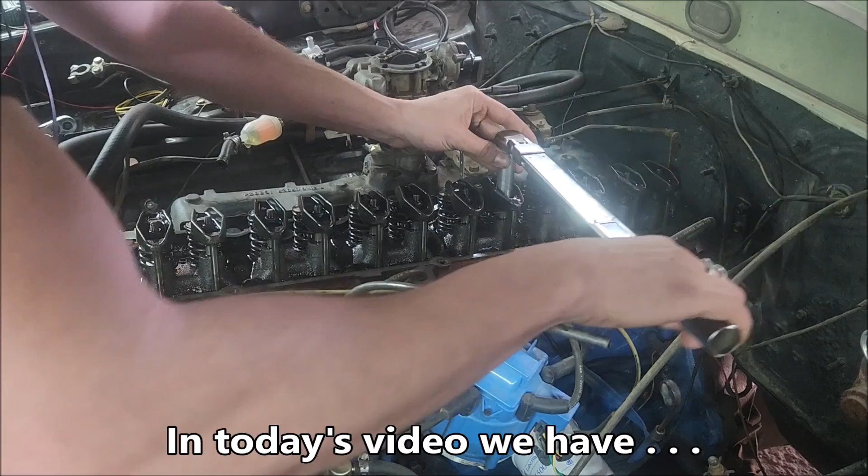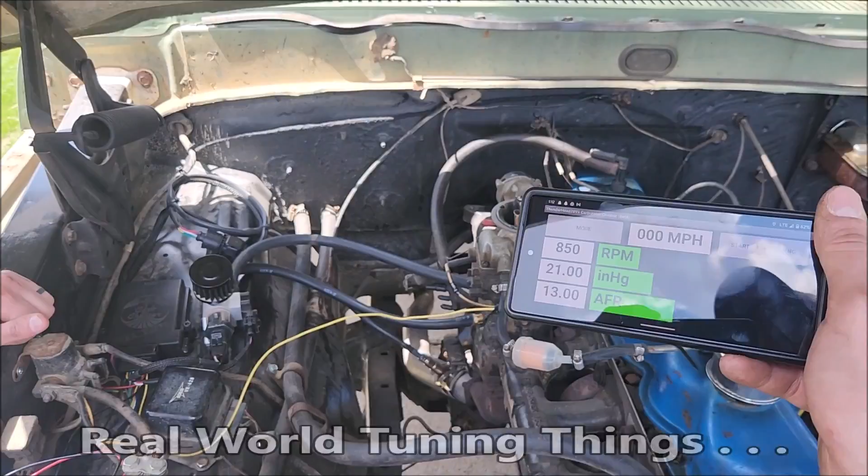I'm going to go through all these the right way, because technically I want them to be on the base circle, just to make sure we're not adding anything from the spring. But technically when something's bottomed out, this is all just thread stretch anyway. Perfect, and that's really all we needed to do. After everything else we did, the thing's just that good.

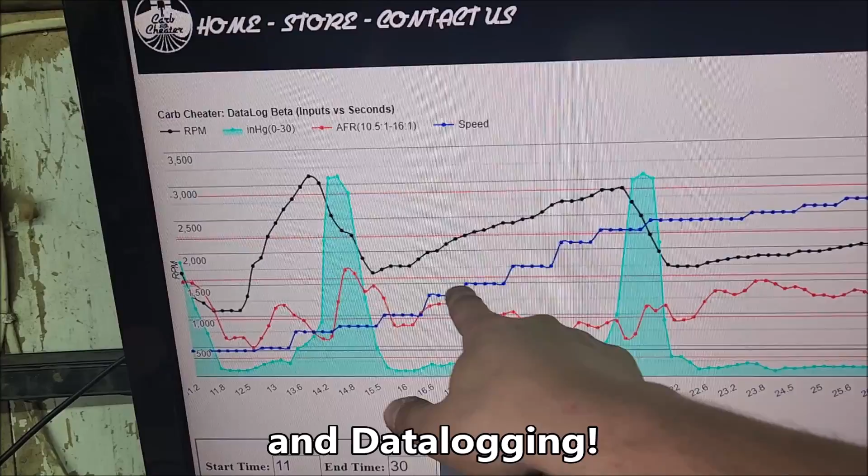51, 53, 60, yay! Oh my goodness. Mid-12s or so, and speed is slowly coming up from the poor little 300 inline six. Our shift where we lift off the gas, and we're at high RPM in a manual, so vacuum's gonna go high.

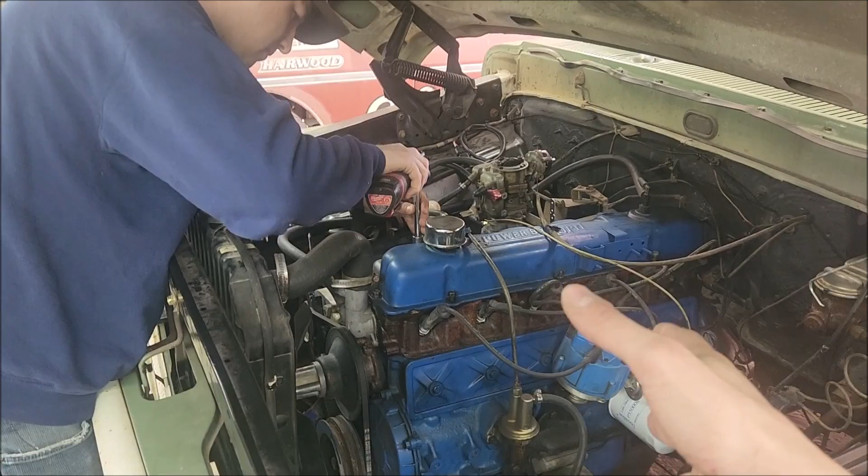So like you guys said in the last video, and we could hear it as well, it sounds like there's some valve train noise. And as we referenced, the cylinder head had been off, so the valve train probably had to be reset. So we're going to get that off and get a look and go through and adjust our valve train really quick. And we also have an interesting ignition thing that we'll get to in a moment, but first, let's get this valve train handled.

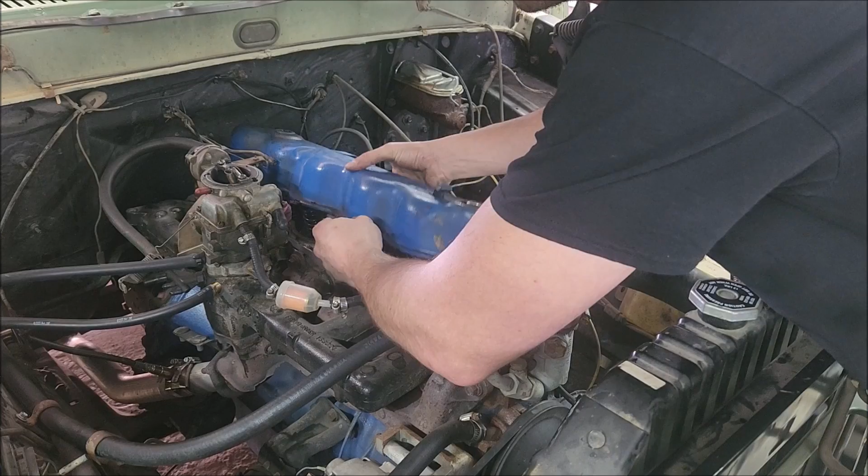All right, so it's kind of some exploratory stuff. So apparently I was wrong in the last video, this cylinder head is not from the 68. And this might be a 240 or a 300. What's the bottom end on this? I think it's a 300.

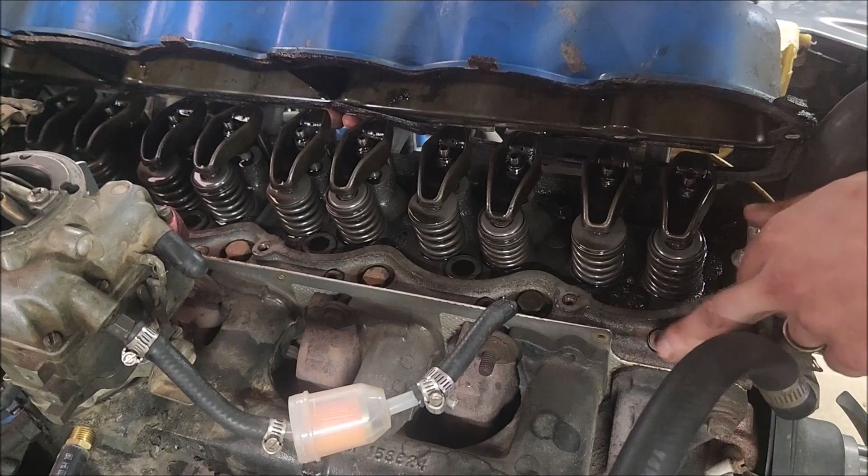Okay, and so the cylinder head looks like it's a fuel injected head with these, and maybe if you guys know, you can let me know. Like I said, I don't have a lot of direct experience with 300s. I thought maybe it would have pedestal rockers, but it doesn't. It does have, in fact, adjustable rockers unless they tighten down on the end of the stud.

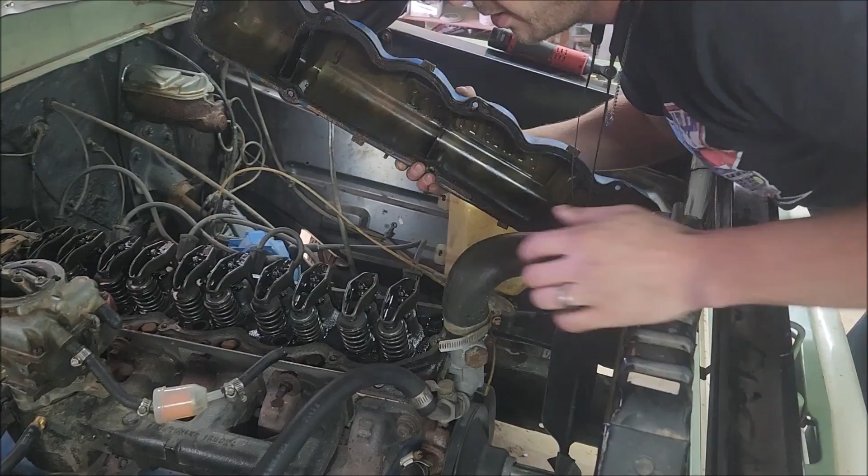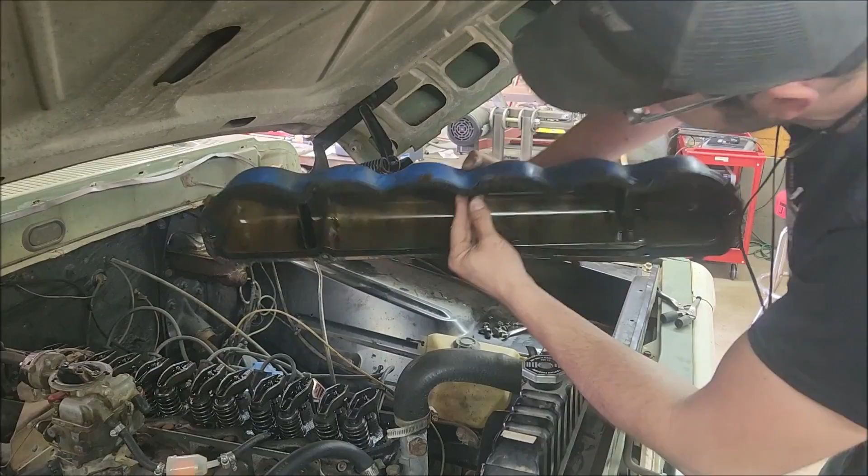So we'll pop one off and take a look. But side note, cork valve covers are pretty good. It always helps to gasket sealer them to the valve cover itself and then run a thin layer of oil on the mating surface, and then they never stick and they always stay on the valve cover side. So luckily we got this one off without screwing it up. It's rare.

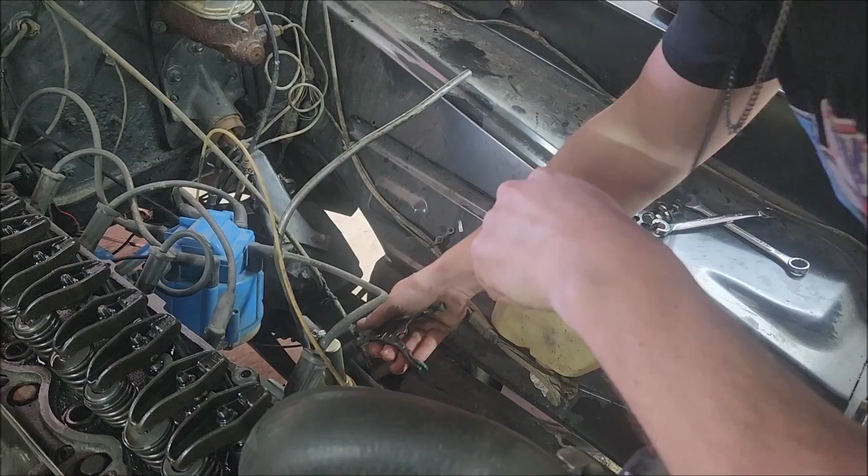Oh mate, it's still leaking. I thought we tightened that. Well, did you get where the vice grips at? Well, they're right there, and I got distracted. All right, there we go. You can always make a quick fuel line clamp with some needle nose vice grips and some rubber hose. In this case, gas tank's in the cab, so that's a lot higher than this point. There we go, lost about like a gallon of gasoline. It's fine, cleans out the sinuses.

All right, so it looks like these are technically pedestal style, and probably 300 inline six guys are going like duh, but you know, I mostly work on Windsors, so I was kind of unfamiliar and I didn't really want to use the Google, but you can tell they're pedestal even though they have a stud. One dead giveaway is the adjustment nut, or rather in this case the locking nut isn't one of those that's, you know, like a lock nut style.

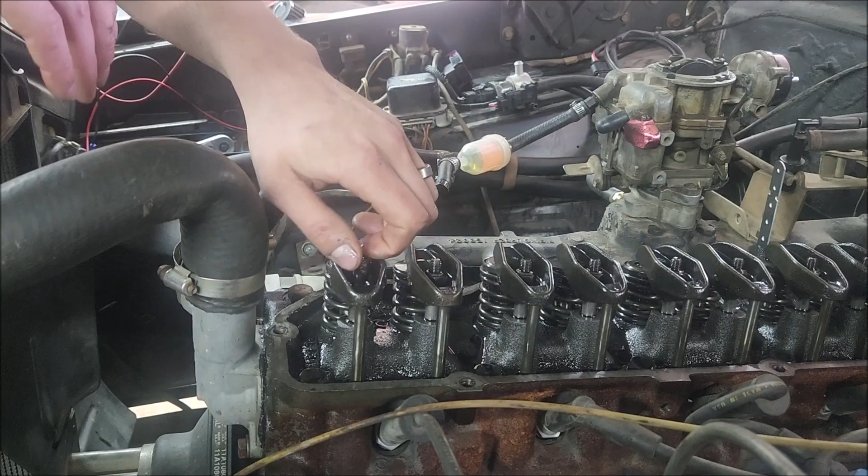It just rotates, and so basically what you're supposed to do is run it all the way down and then just set it to the torque. Let me get the rocker arm off here.

So you can see it spins on easy. If you tried to adjust this and say, yep, it's good, this would move all over the place. So it's supposed to be down all the way with the rocker arm on there, and then it's just torqued, much like a normal Windsor style pedestal rocker.

A lot of people get tripped up by this stuff on forums with these on some Windsor cylinder heads. So we're going to go through the sequence just because I feel better about it. When I do valve train, there's a lot of different ways people say, tighten this, go a quarter turn, tighten all of them. That's a bunch of tomfoolery.

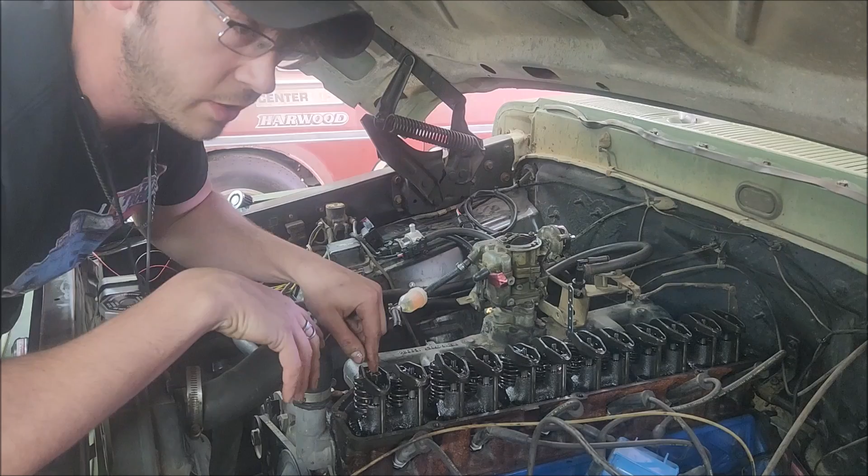The easiest way to be sure of everything is right now I'm turning the engine over and watching this rocker arm. When it's at its max dwell, it's not going down anymore. Now if this was an adjustable rocker, you could successfully adjust this rocker on this cylinder, but in this case we're going to torque it, and I just feel better about doing it this way anyway.

The reason I do that is it works for any engine, because there's no engine on the planet where, when the opposing valve is at max open dwell, the valve we're adjusting is opening. You want to be on the base circle of the cam, and 100% of the time it's going to be on the base circle of the cam in this case, with almost any engine I've encountered.

So when you don't know or you're not sure about things, it's always a good idea to look things up. This is a weird hodgepodge engine, and I'm not familiar with the torque spec on these in-between era pedestal stud rockers that you torque instead of making an adjustment with preload. They're just going to be what they're going to be. I think we found that they're supposed to be 20 to 25 foot-pounds, somewhere in that range. 17 to 23, whatever.

I'm going to go through all these the right way, because technically I want them to be on the base circle, just to make sure we're not adding anything from the spring. But technically when something's bottomed out, this is all just thread stretch anyway.

Okay, well, they're all tight, and they're just going to be noisy, apparently. It just is what it is.

Good. Sewing machine. Sewing machine indeed.

All right, we went through all the valve train, checked everything. Everything seems just fine, so we can cross that off our list. Now we're looking at this ignition piece.

Now on a Ford like this era, you know, '68, it would have been a points ignition vehicle. And even Ford, having a love affair with the Duraspark in later years, they all had resistive leads. Now this has an HEI distributor in it, so it's expecting to see 12 volts.

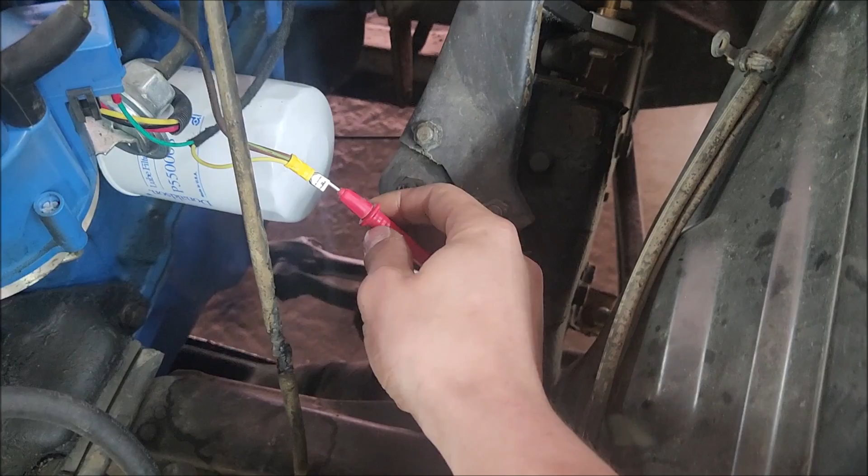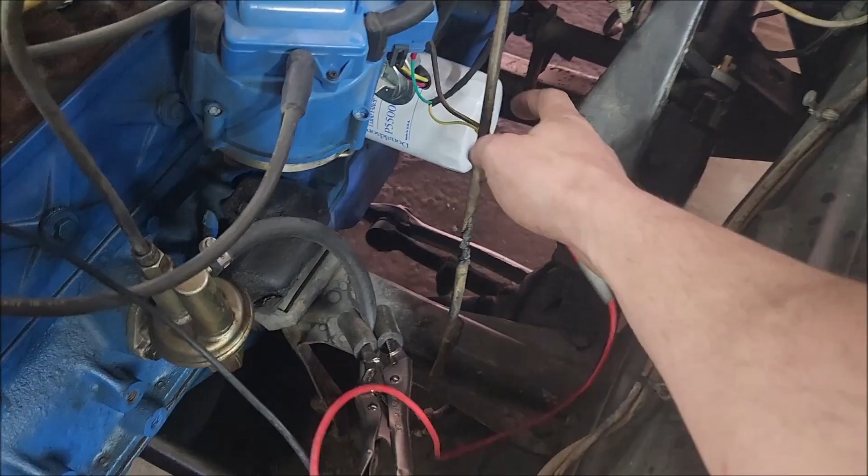All right, we've pulled the ignition wire from our HEI, which definitely looks like the factory Ford wire, so probably definitely a resistive lead, but we're just going to verify. So our positive lead is here on our ignition wire, and then we're grounded to the block.

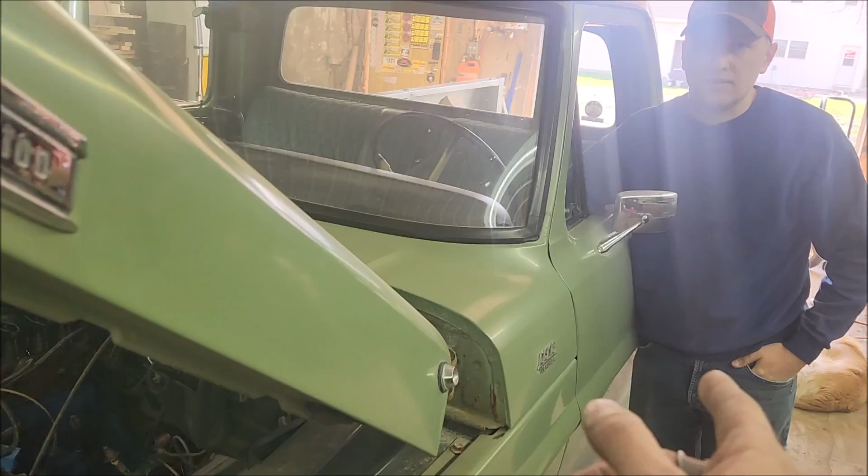Got our multimeter set to voltage. Joe is going to flip the key on to ignition. Good? Yep. All right, and then we're going to take a little look in here. And it reads nothing. Is your key on? Key's on.

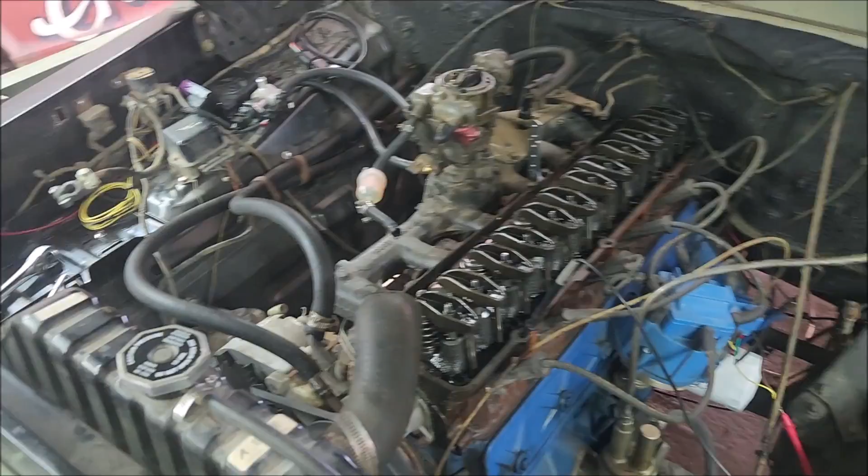Oh, your battery's not on, though. Forgot I borrowed that for the tractor. Rip. Okay, here it is.

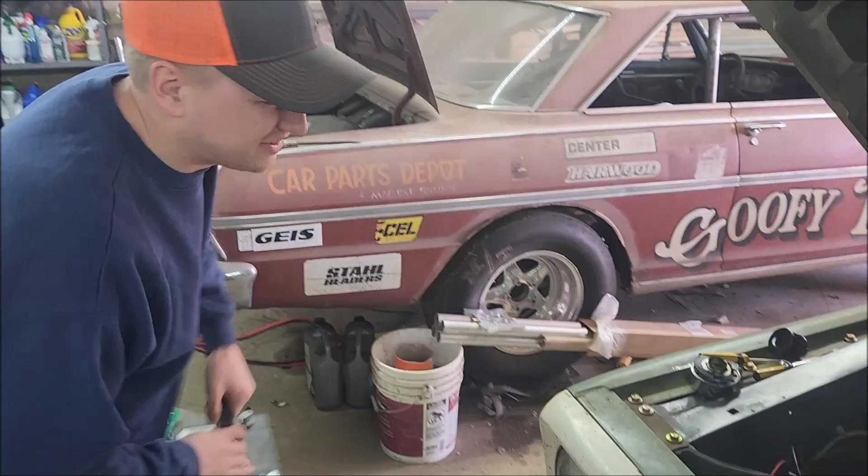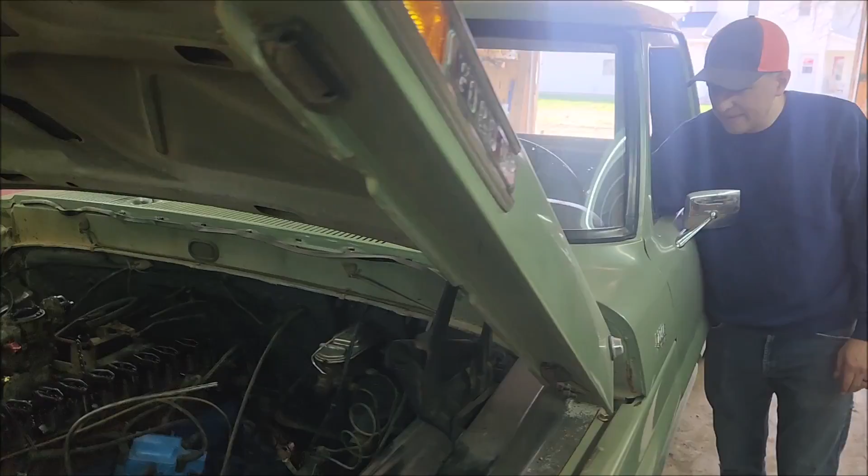All right, so take 2 with the battery, mate. Is the meter on? Sure is. How about now? Oh no, it's actually 12 volts.

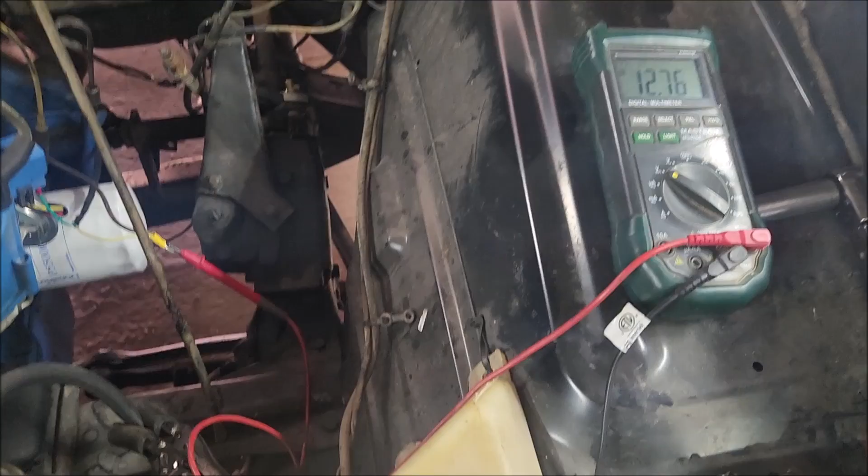Oh, well, that throws a wrench in things. So what do we got going on there? 'Cause I'm pretty sure that's the resistive lead. Now normally I test this with a vehicle running, but being the HEI, I didn't. I don't know if that plays into it in any way, shape, or form. I guess it could, question mark?

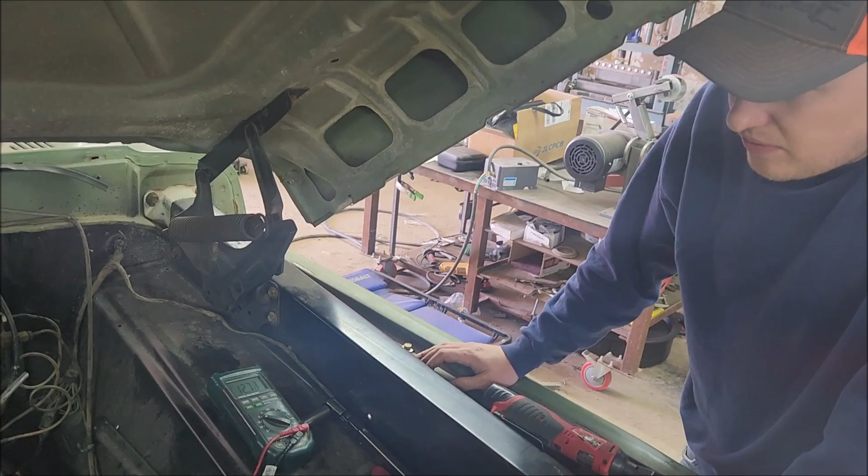Yeah, I mean, if the resistive lead has no current passing through it, it basically just allows all the voltage through it. V equals IR. Science guy, doing science things. So alright, well, let's throw our valve cover back on and check that again.

Fancy tool guy. Lazy tool guy.

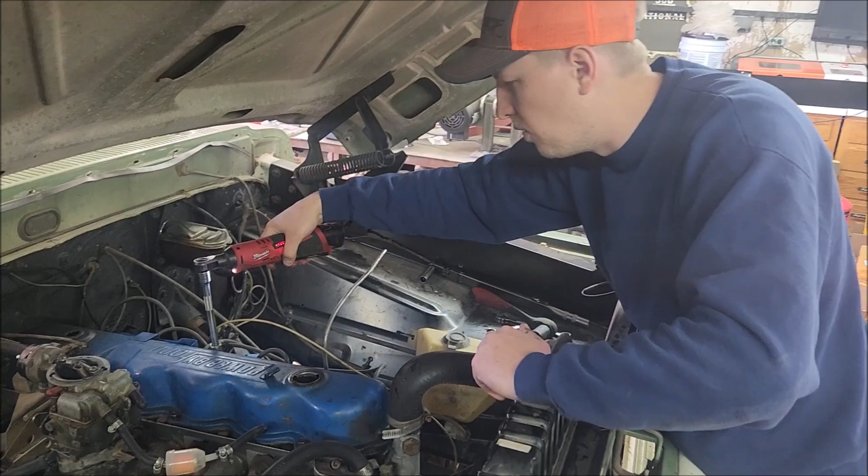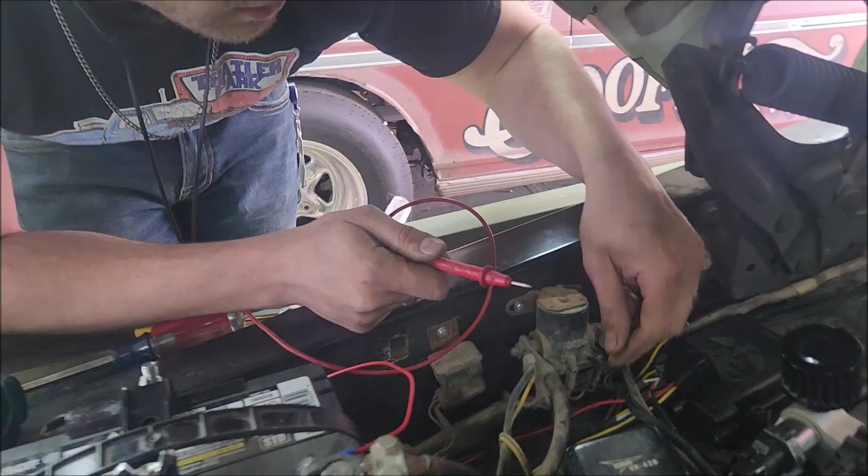So I think Joe bested me here, he's definitely right. At least this truck definitely was originally a resistive lead. One key indicator is on the Ford starter, it has this I, and basically when you're cranking...

...it supplies 12 volts and bypasses the resistive lead. So without starting the truck, if we unhook this, and it's a 300 so it'll probably just start because that's what it does, and we crank it, we should see a lower voltage. Right now we have zero.

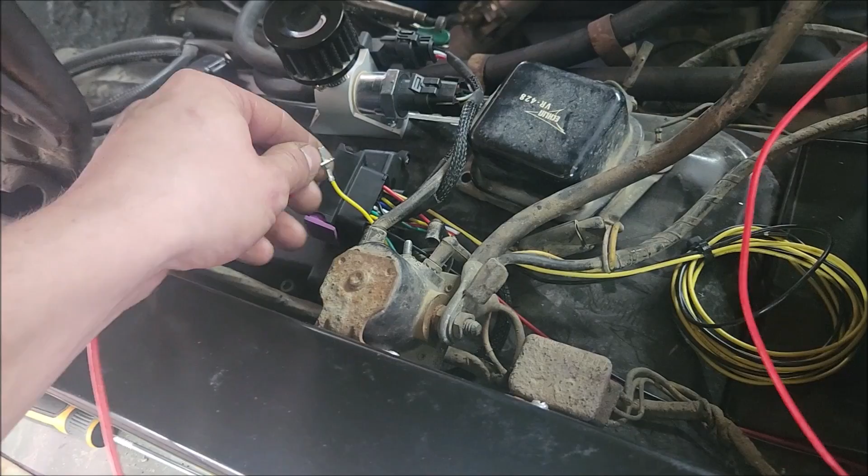All right, so Joe's gonna crank the truck here with our lead unhooked. We should see less than 12 volts. Actually, turn the key on first, and then we're gonna look at it. Key on. All right, see, there we have 12 volts, and we don't have any load on it. So now go ahead and crank it over.

Yep, it's a resistive lead for sure. Okay, you were right, sir. You have bested me. Electrical engineering school did something.

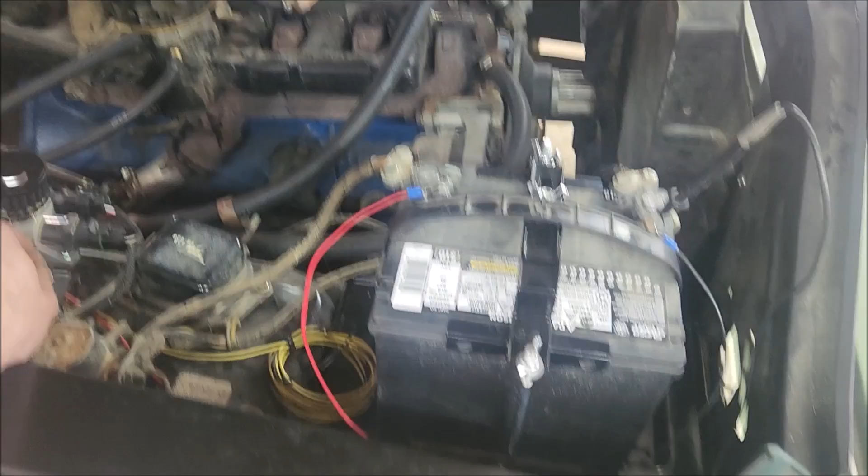Hey, there you go. All right, just for some science here, we have the lead hooked back into our starter solenoid, which should bypass and give 12 volts to the ignition while cranking. Go ahead and crank it. There we go. Yep, higher voltage cranking, and then once running, we're back to our resistive lead.

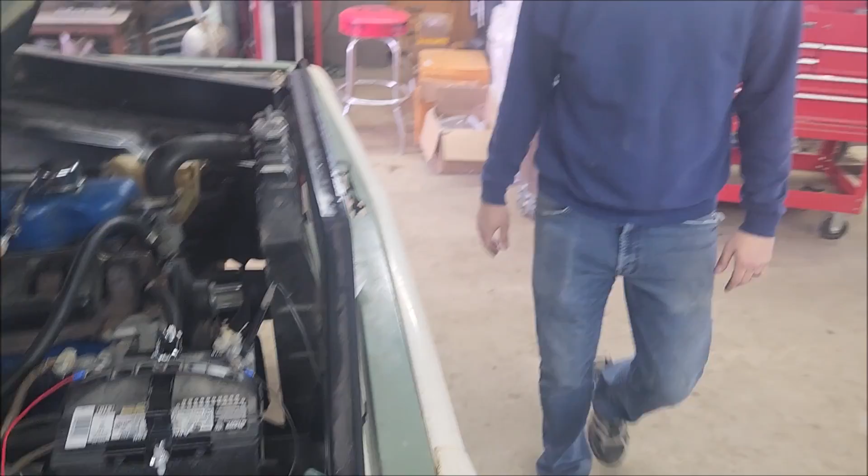Okay, problem solved. So it's been assessed that we have a resistive lead. Now, the right way to do this is to climb under the dash, clip the resistive lead out, and run a new wire. But we're kind of on a tight schedule today, and my back hurts, and I don't want to lay under the dash today either. So we're going to do something a little unorthodox, but we'll see how it goes.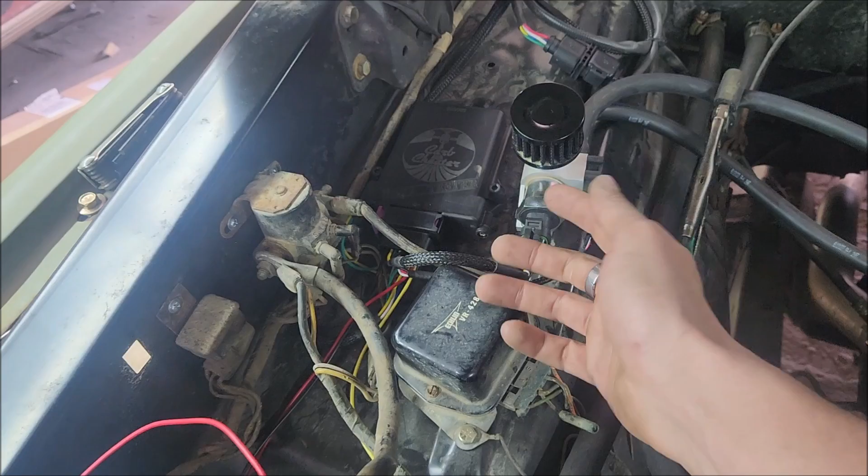So with the carb cheater here, we have kind of a universal auxiliary lead that you can set up to do anything you want with it. Our thought was kind of a window switch, which is basically an RPM-based switch, or you could use it for a choke. There's a few different settings you can set this up with in the app, and we'll look at that in a second.

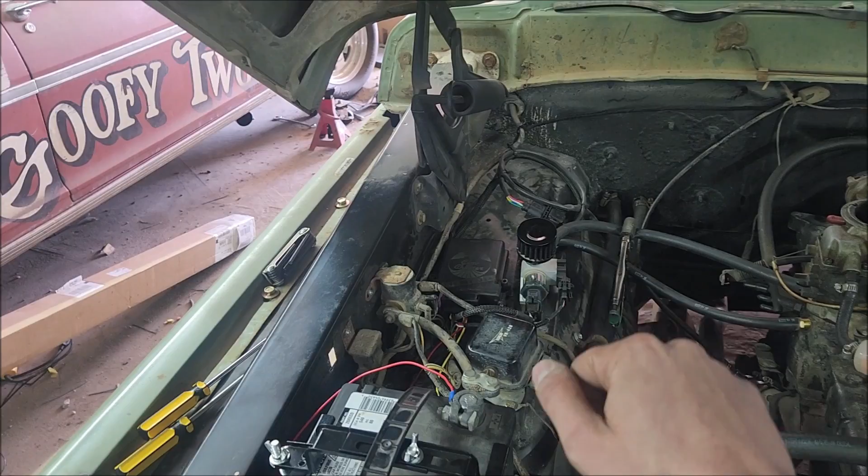But basically, it's a dry contact. So all we have to do is hook one of these leads to the battery, and one of these leads to the ignition over here on the distributor, and it toggle saves for this setting we're going to use. So when the key's on, it's going to be passing 12 volts to our distributor like we want, and when the key's off, it's not going to be.

Is this what you should use this for? No, our main thought was to use this for a choke, where when your key's on, now you have power to your electric choke. But it'll work for this, and we're just going to see what happens.

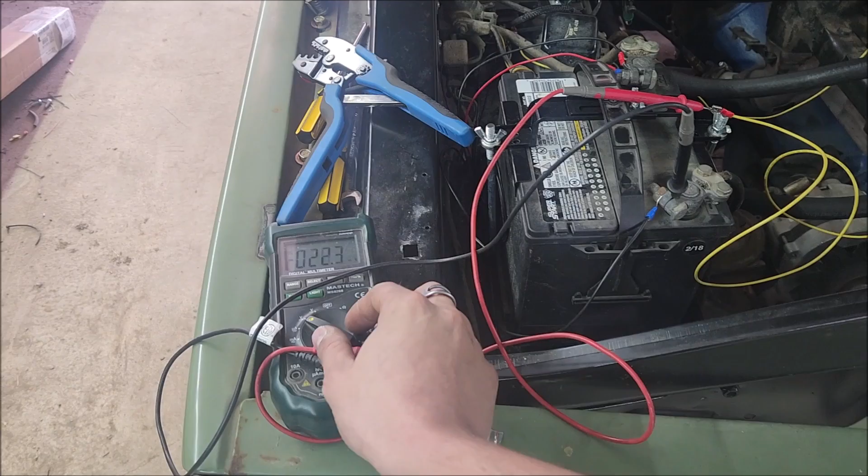All right, we got our carb cheater dry contact leads. One side's hooked into the battery, and at the moment we have it probed here with the multimeter so we can take a look at how this works. Make sure we cycle our multimeter so it doesn't shut off in the middle.

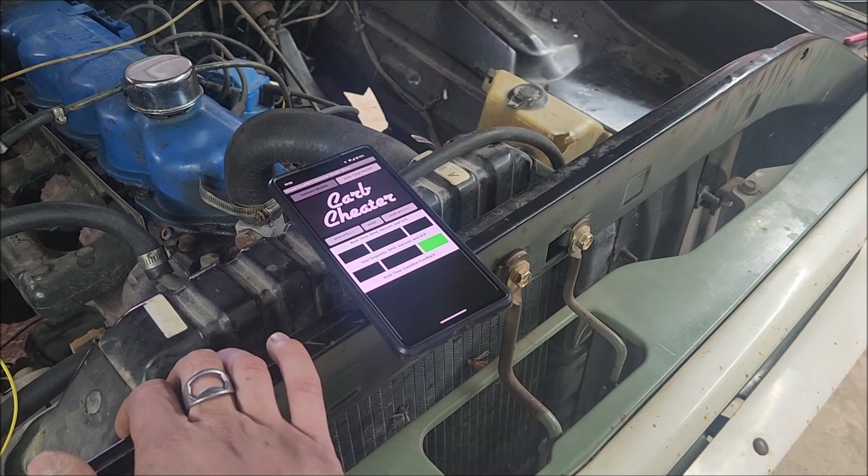Okay, let's go ahead and open our app. Should auto connect here. Bing, there we go. So now to get to the setup screen, you'll put in your product key. Each of these has a specific product key for it, so someone can't connect to yours and do crazy stuff with your engine. Each one has its own unique code.

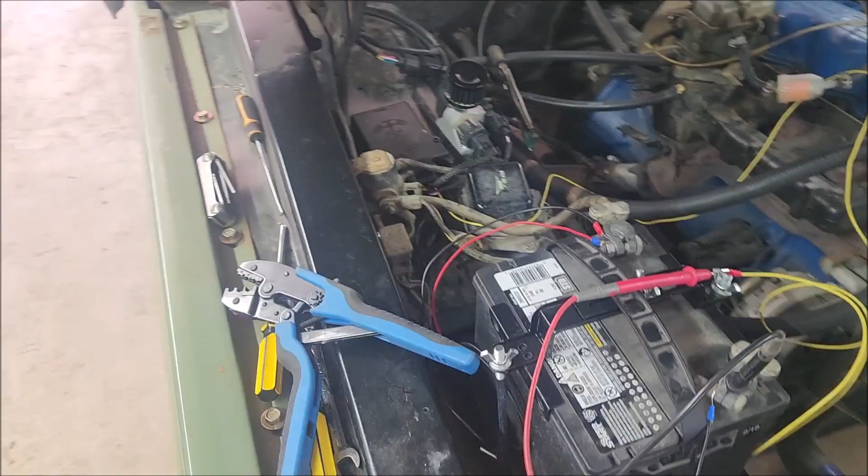So anyway, now we're at the setup screen. We're going to go ahead and test our relay. You can hear it clicking in. So here we go. 12. All right, so that's kind of our test feature where you can use it just to verify things.

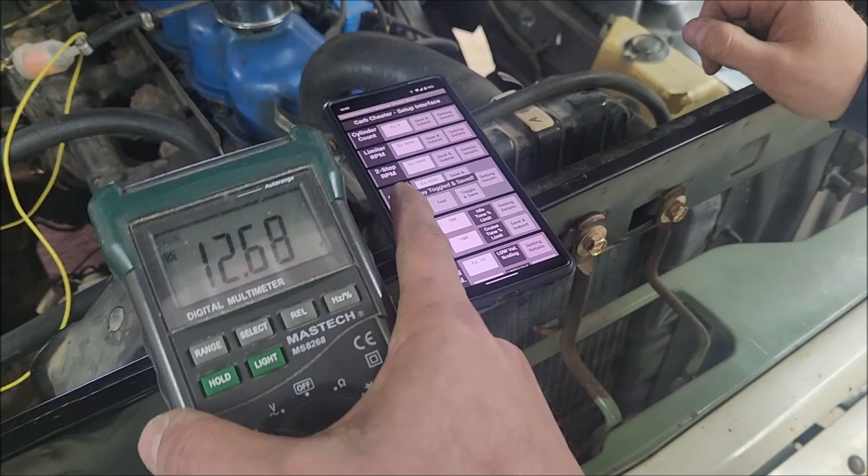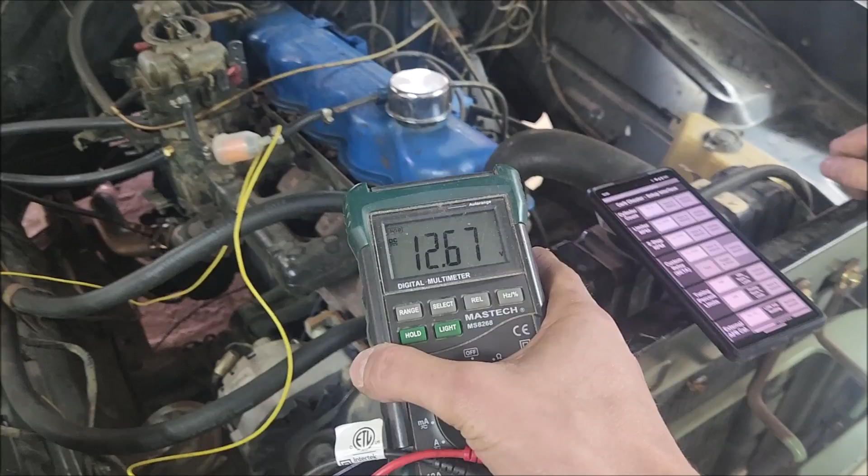And now there's a toggle and save mode. So now it's on, and when the key is on and carb cheater is on, this relay will also be on. So that was kind of my thought with an electric choke, it could be used for different things. It also has a setting for RPM where it runs basically as a window switch, where above this RPM it's going to be on.

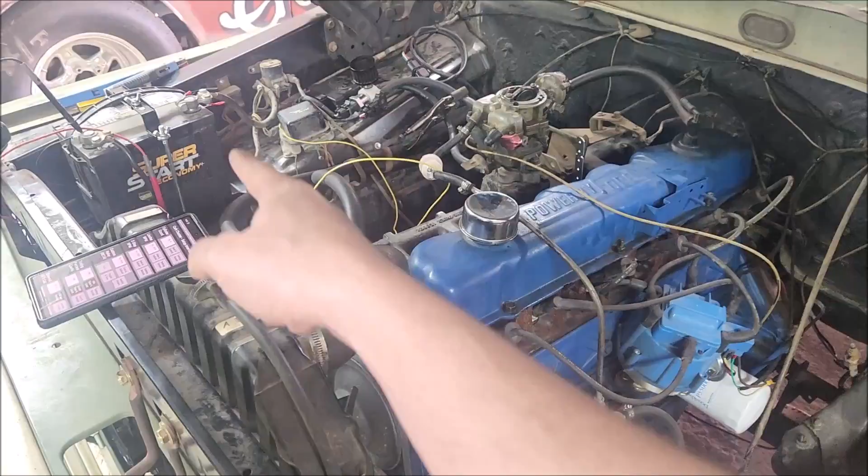So you can use it for a shift light. I don't want to say you can use it for nitrous, but maybe you could use it as an interlock for that. It's really up to whatever you want to do with it. But in this case, we're going to take this signal and send it over to our ignition coil. We have our resistive lead taped off here, so when the key's on, we're going to be sending full 12 volts to the ignition via our auxiliary relay.

And parts are here. Oh, good, finally getting some of our parts in. There we go, there's a bunch of carb cheater harnesses. Pretty cool. What do you think? It's a lot of harnesses.

All right, so we're all hooked in here at the coil. Obviously you can see this is very temporary. You'd want to get back and actually do this right and run a wire from under the dash that's 12 volt and bypasses the resistive lead. But for now this will work, and I think we're good to go and can hit the road.

Now it seems like with folks that have Fords, I see a lot of negative comments associated with Pertronix, everyone saying the HEIs burn out and are unreliable. Really it's because Fords, if you had a Duraspark or points ignition, which most classic Fords do, they all have this resistive lead in place and no one ever removes it. In the documentation for HEIs or Pertronix, it says in numerous places that they need to be supplied with 12 volts, and hitting them with an undervoltage scenario ultimately just burns all that stuff out. So if you have a Ford, look out for the resistive lead, bypass it under the dash, and you'll be totally fine.

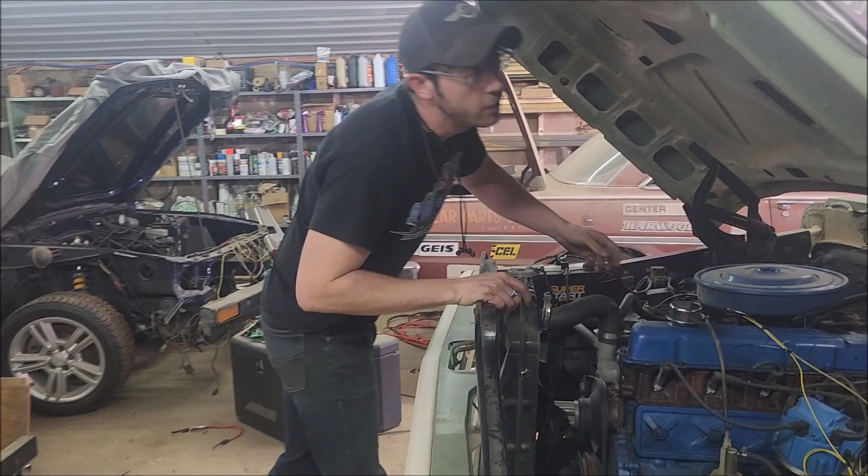All right, air filter's on, everything looks like it's good to go. I think it's time to start the truck up and drive out. We're just going to shut the hood. We're just going to assume we're going to succeed today.

All right, looks like it's about that time. What a nice interior on this truck that you have here, sir. It's a very vintage 70s seat effect. All right.

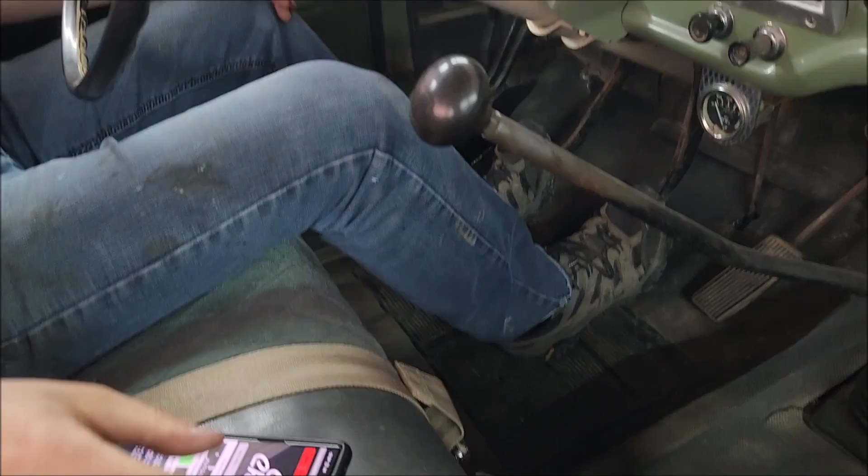Oh, maybe our ignition thing didn't work. Maybe not, let's see. Oh, we got our ignition lock on. Oh, wow, oh, it runs. Works a lot better, weird, without that on, when theft deterrent's off. Strange.

All right, so we're going to hit the road here, and we're going to keep our auto tune adjustment off on the carb cheater for now. We just want to get a baseline and see what this truck actually does on its own. Never had any gauges on it before, and just really have no idea. So let's hit the road, see what we have.

Now one thing that's interesting is this truck's had some rear end gear swaps, so apparently the speedo's never been right. I'll be really interested to see how it does against the GPS speedometer, because we also don't really know how fast the truck actually goes down the road in whatever gear. It would help if you put it in gear too. Oh, you don't need that.

All right, so we're on the road and some pretty interesting discoveries. I always try and tell everyone that ignition and air fuel ratio very much play off of each other. So now we've largely done nothing to the carb, and before this thing was pig rich, not counting the float sticking, that was a different issue that we corrected. But now with the ignition seeing 12 volts, we're going down the road and our AFR is 14, and everything looks super clean. Let's take a look at this thing.

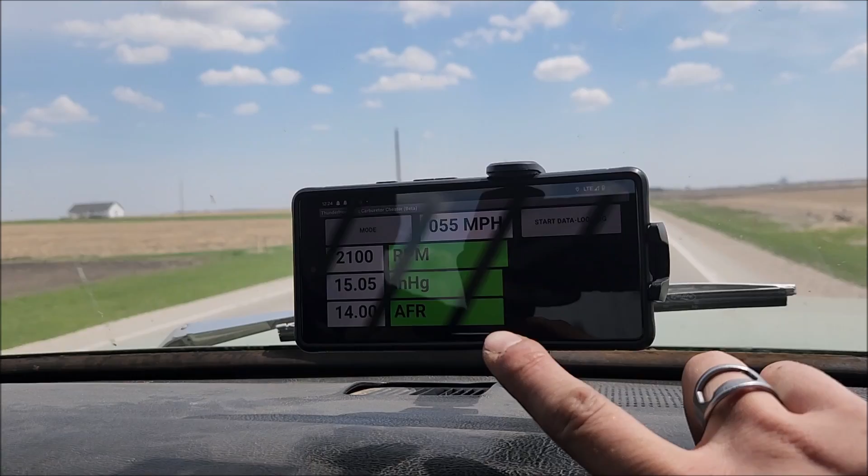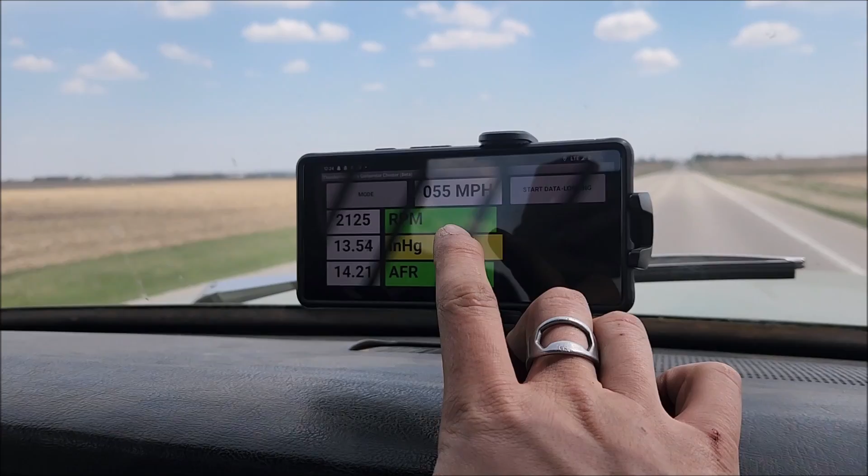So it doesn't come through perfect on the camera here, I'm sure you're seeing the shutter speed, but we're just cruising down the road at 14 with our AFR. Our speed's working good, the speedo is about 10 off or so, so it's pretty handy to have that here. RPM, everything's just pretty clean. Go ahead and toe into it. Pretty good.

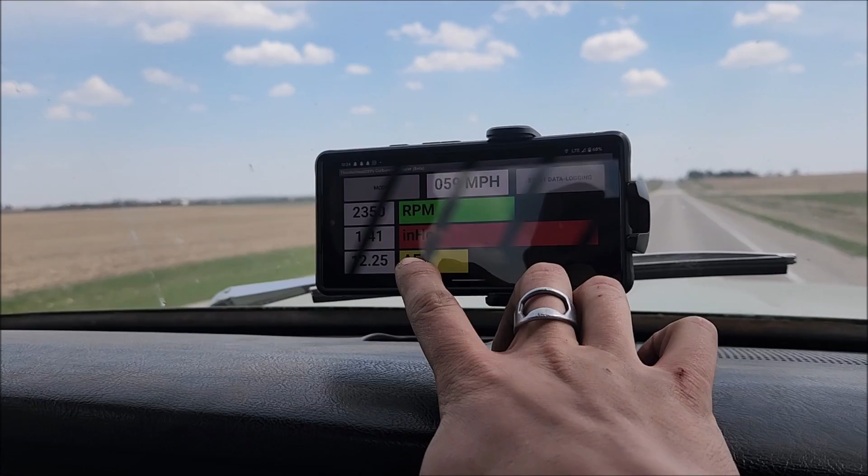So this just shows you how much that one barrel kind of in a way holds it back. It still has manifold vacuum left at full throttle, so anyway it's kind of an interesting piece. But yeah, AFR is really clean, and this is with auto tune off. It's not doing anything, this is just raw carb at the moment.

Good clean shot of Iowa in its natural habitat here, where you don't have cattle, you have cornfields, of course.

Like I say in a lot of my tuning videos, carburetors are forgiving, but ignition timing really isn't. We kind of saw from the AFR that something didn't seem right in our last video, so we went poking around more and found some notable issues with our ignition timing that were causing some pretty significant potential problems. We corrected all that, and magically our AFR is notably better than it was on our last drive. Being able to see what's going on with the engine is very revealing when you need to do something, or if everything's just fine and you can drive down the road and not worry about anything.

Driving around, everything looks actually pretty good on the tune for this old one barrel carburetor. There's really not a whole lot to do except tune the idle, which seems to be a little on the rich side, around 11.5. With the AFR right in your hand, you can just dial that in, just that easy I guess. This feels like cheating since we don't have to do any guesswork.

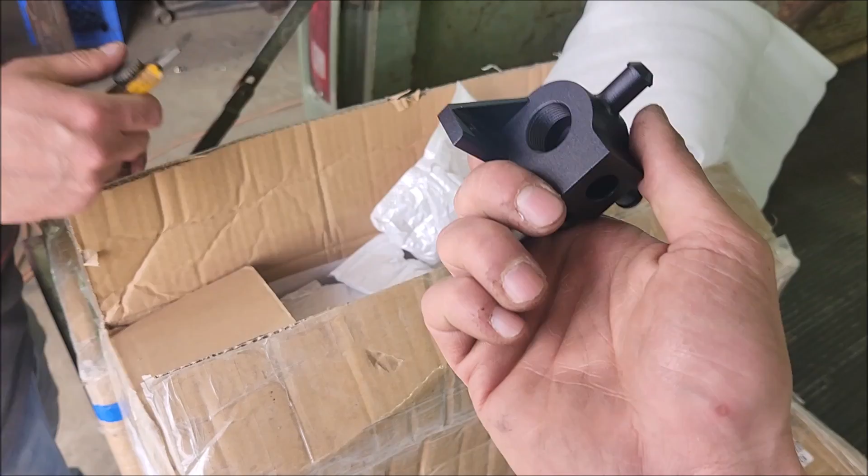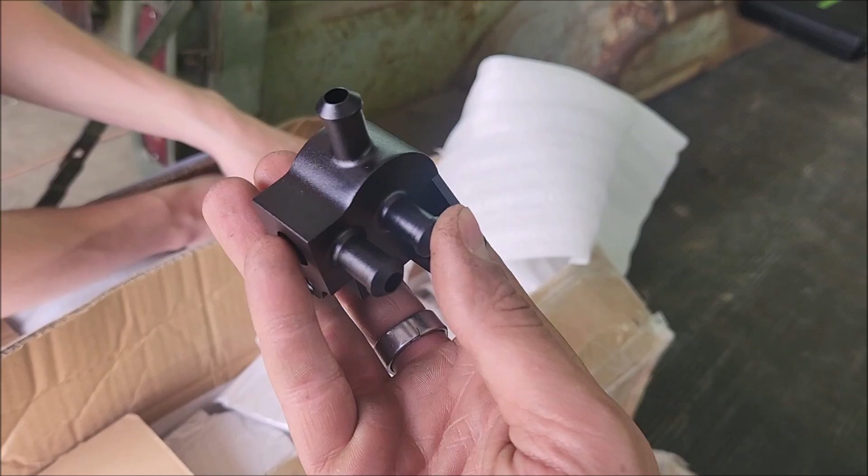Apparently it's Christmas today, the UPS guy just showed up and dropped off all of our valves and spacers that we designed and had machined. Wow, fancy, they did a good job on those. I'm just still amazed they could machine that out of one piece so cleanly. That's better than their samples. That's aluminum by the way, that's not plastic.

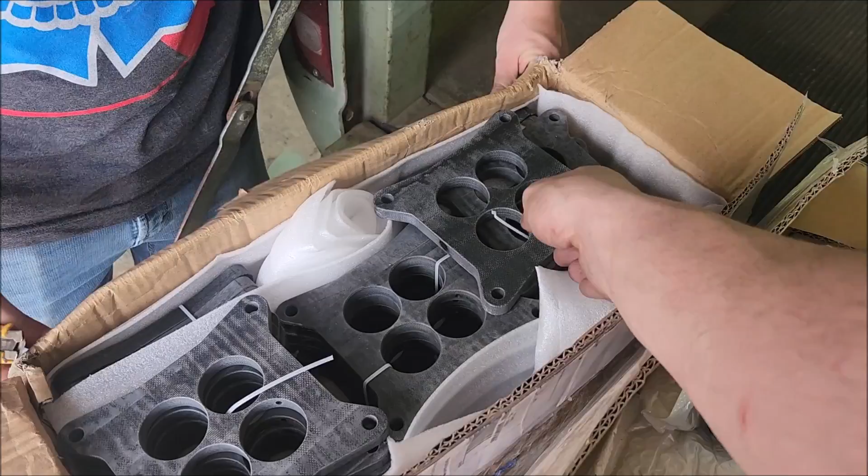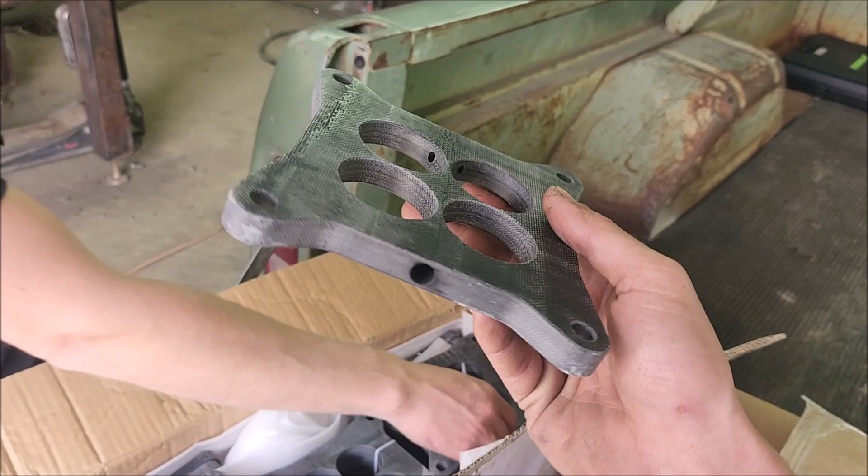Alright, round 2, the spacers we designed. This is true phenolic, except it's even one step better than that, and I'm not going to tell you exactly what it is, but it's pretty good stuff. We press in the brass vacuum ports that we designed for the 4-barrel stuff. You can see here you have 2 common manifold vacuum ports that you can put under your 4-barrel carb. It's also super insulative, so it does a great job of keeping heat off the carb and mitigating all those heat-related anomalies.

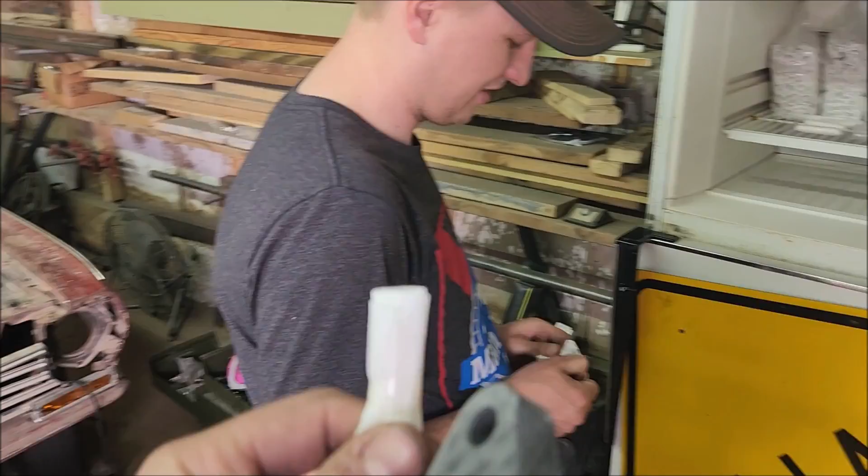What do you got in there? Open that again, that looks really suspicious. It does look really suspicious. That looks bad. It's got all the fittings. All things that are good. That's a nice fitting.

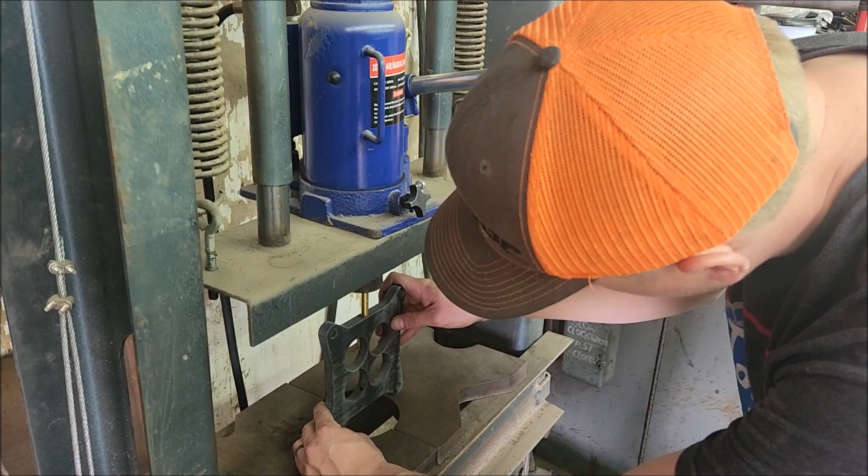Alright, so we got a little distracted there. Let's get back to the truck and take a look at our 0 to 60 run data log, which is going to be absolutely hilarious. But let's step back from that. This is an Iowa farm truck, it's not about hot rodding, it's not about speed, it's about good drivability, consistency, and reliability, and it seems like we've achieved all that. It runs and drives really good, AFR and all the telemetry looks good.

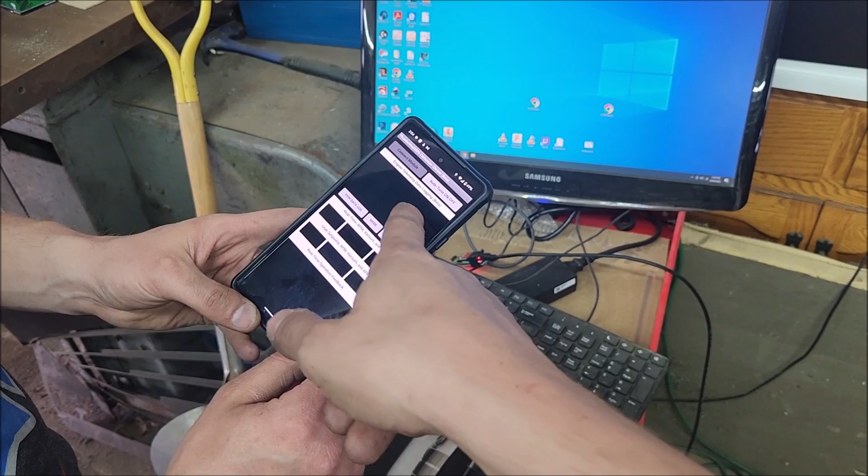No complaints. So I failed to mention when we were in the vehicle that you can actually look at your data log on your phone, but you can also email it to yourself and look at it on the computer. So I'll show you how we get there from the phone. You have where you can view your data log, which kind of does it in script form here, so you can go through that. But what's really nice is the graph data log.

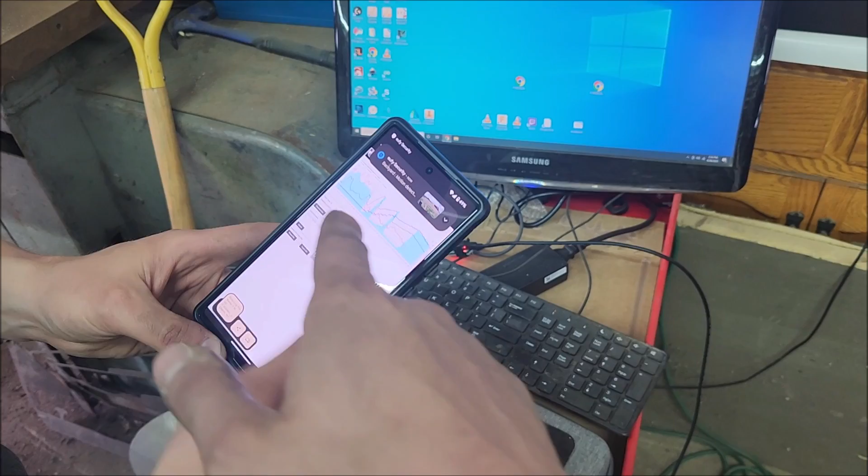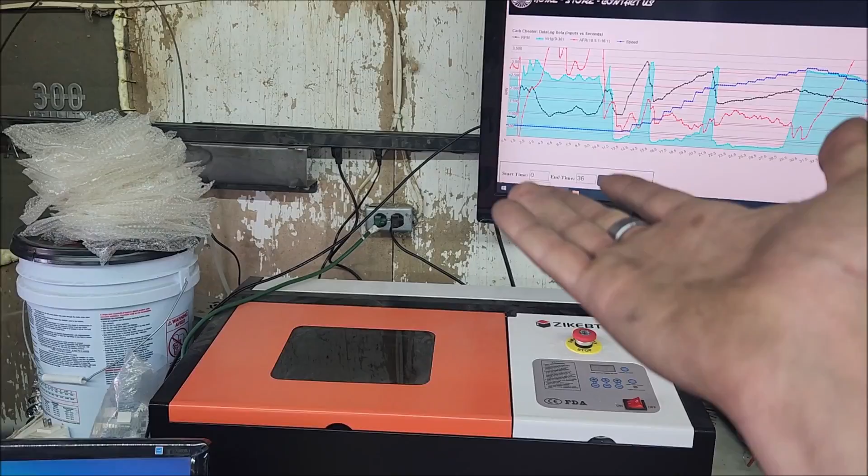So that's going to route to our website, and it pulls in your data from your data log and represents it in a graphical display. That's pretty much what we have here on the screen because we emailed it to ourselves, so that was really easy. You see here we've got a few things we can do.

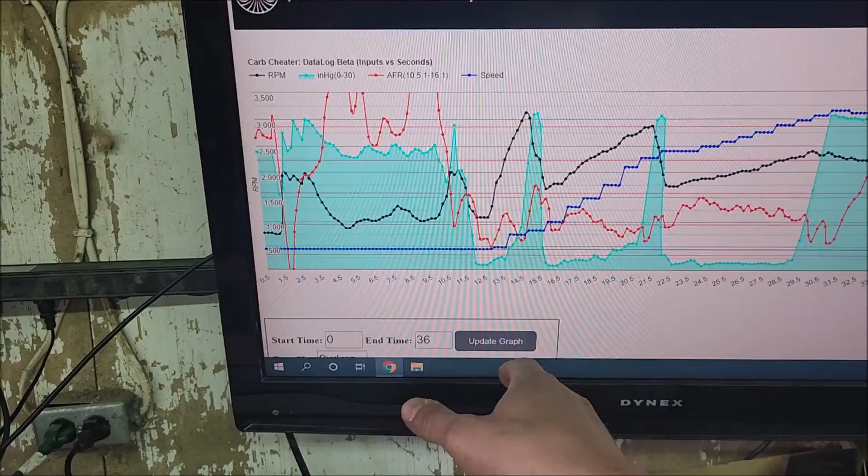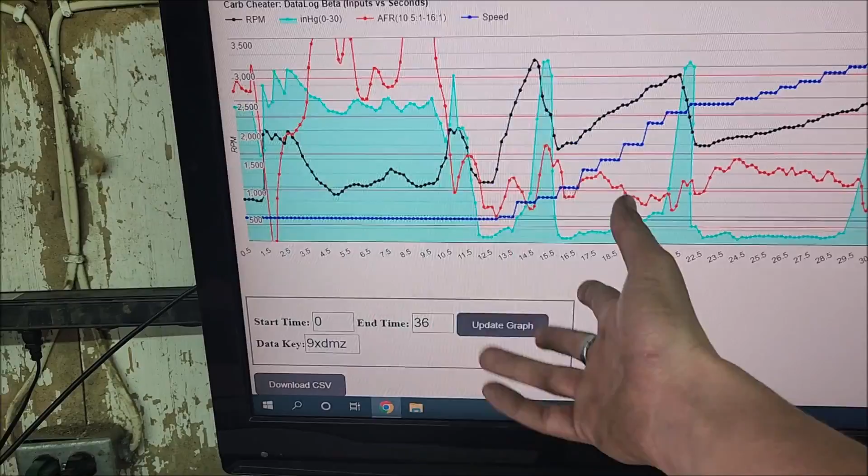Move your start and end time around. So if you want to zoom in on an area, you can manipulate these values and it will repopulate your graph. If you scroll down a bit, here's your data key. This will save for 30 days, and you can email this to yourself, which is what we did, so we were able to auto route to the web page here.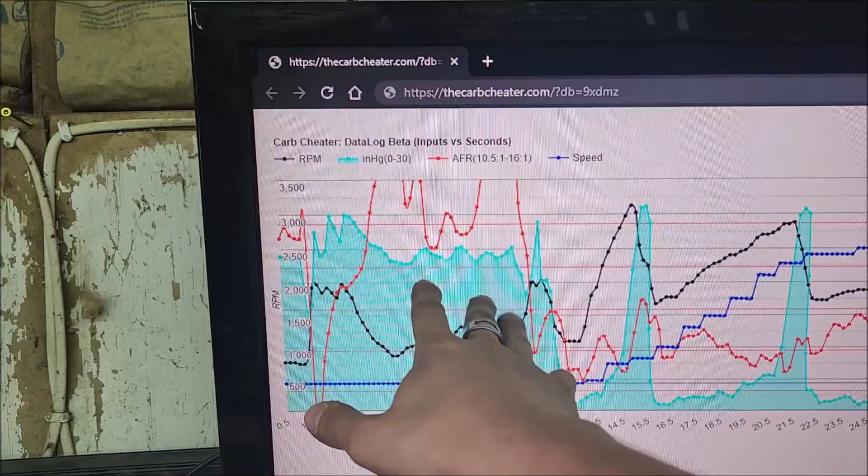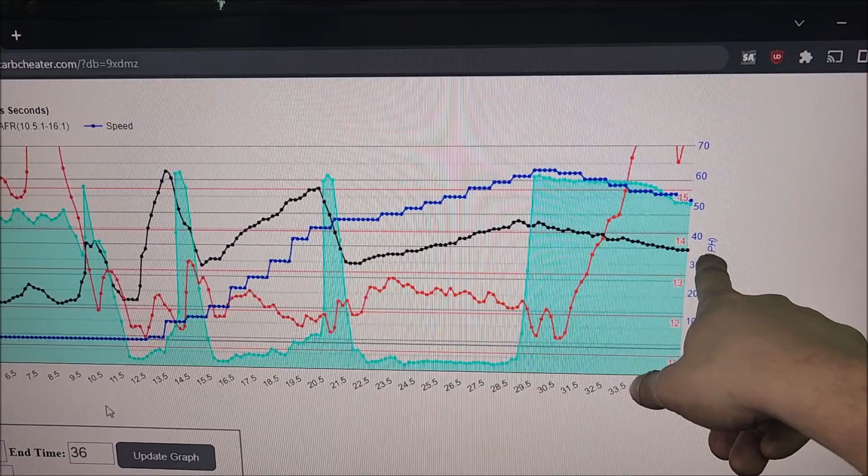So just looking at the data log, here's how to interpret it. The blue is our vacuum, basically our engine load. The red is our air-fuel ratio, and here's what your AFR is on the axis. Your speed is also blue, and the black here is your RPM.

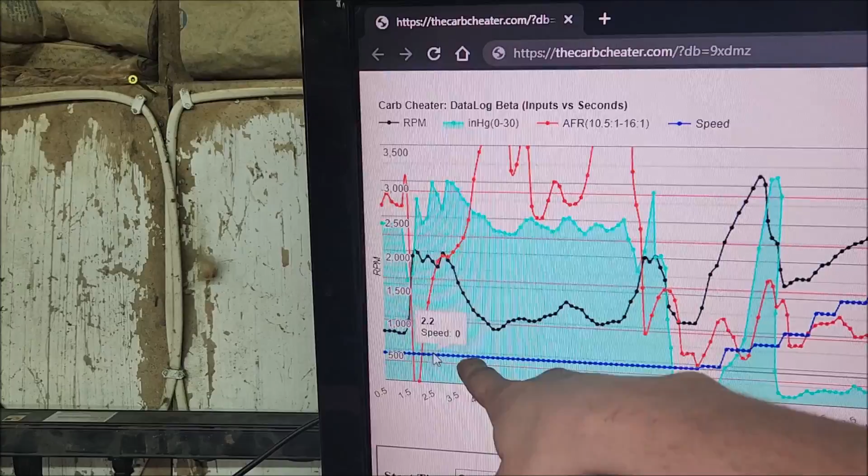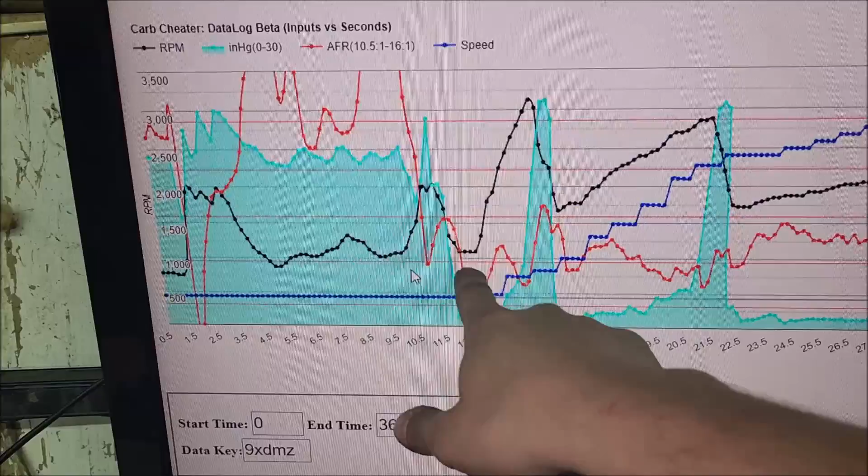So you saw we were idling here somewhere just below 15 on the AFR, down at like 700 RPM or so. You can zoom in and really see what you're doing, around 750 RPM. Joe revved it a few times, and then we stood on it, and since it's a manual, you can see our gear shifts and some of our telemetry here.

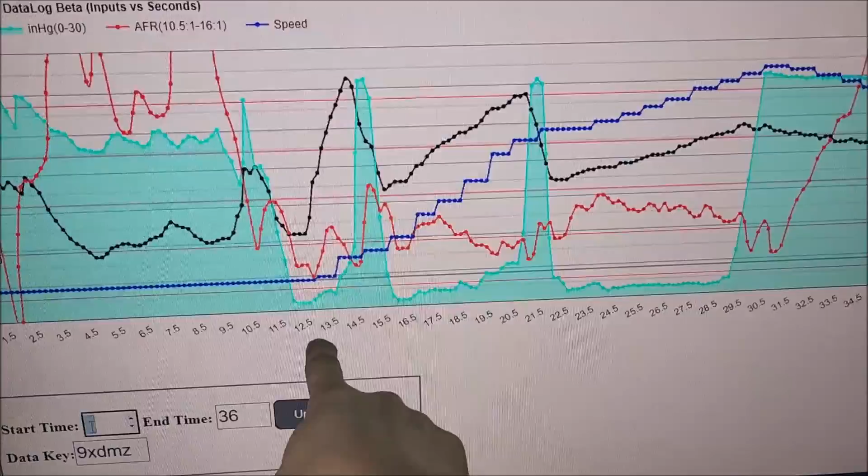So let's go ahead and manipulate this and zoom in on our 0 to 60 time. That starts at about, I don't know, 11.5 to 30. There we go, that repopulated our graph.

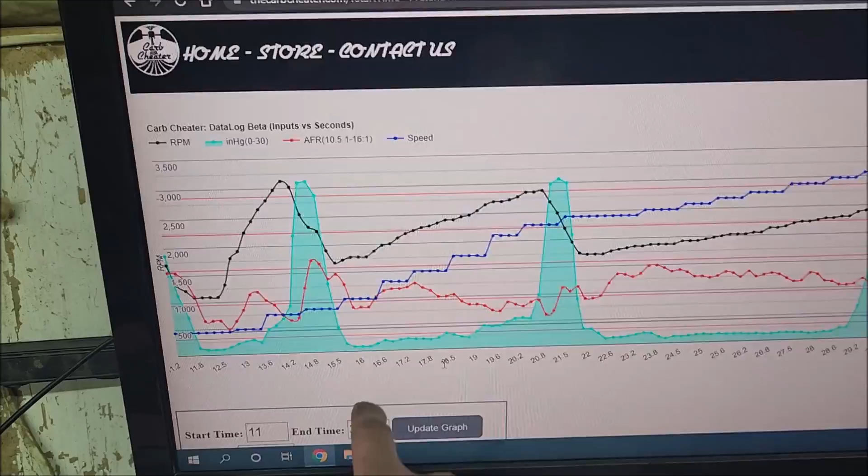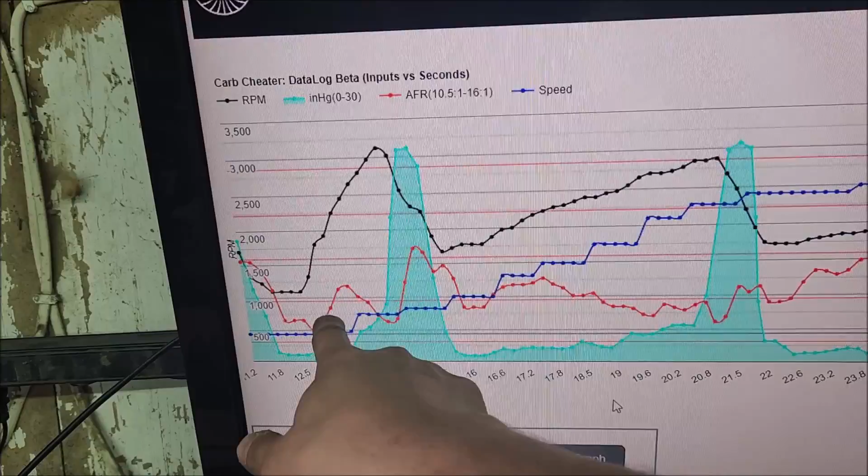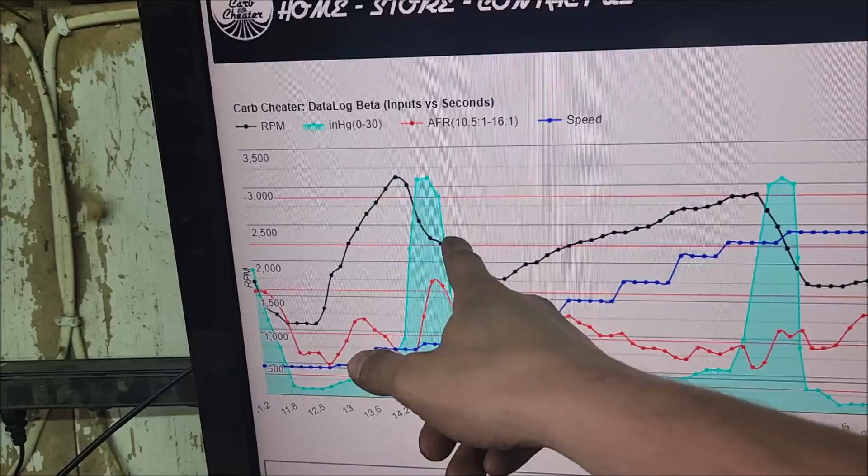So you can see we hammer on the throttle here, RPM goes up, our AFR drops down to a nice safe range in the mid 12s or so, and speed is slowly coming up from the poor little 300 inline six. We shift, lift off the gas, and since we're at high RPM in a manual, vacuum's going to go high. We grab the next gear, climb through, do it again, and then 20 seconds later we actually get to 60.

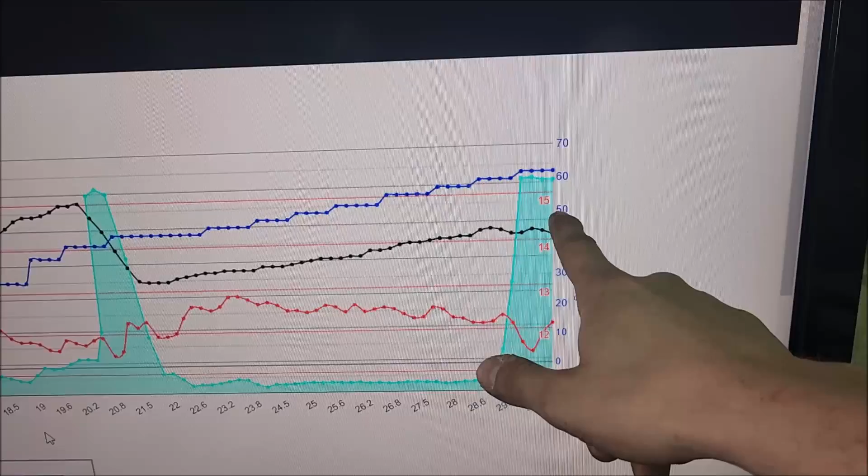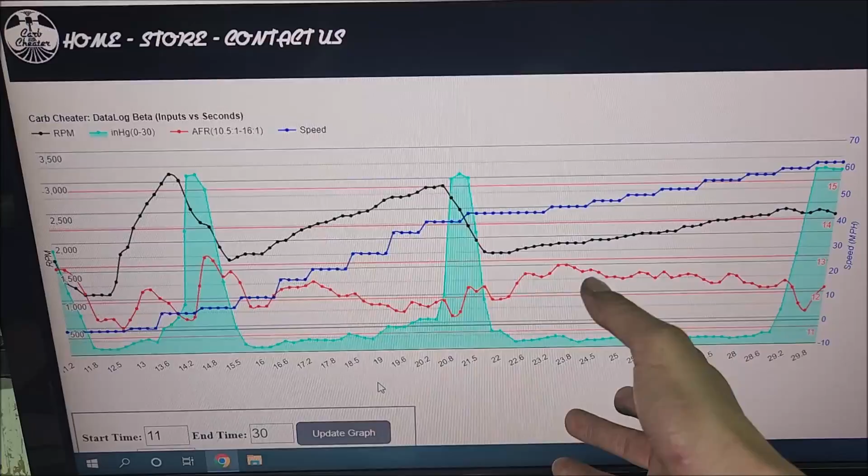So we kind of set this data log up in a way that wasn't really out there before, and we like the way that it reads. It just seems like a handy thing to have, because now we can look back and see what was going on with the truck without having to see it in the moment, keeping our eyes on the road. It's safer, and you can think about it later versus right then and there.

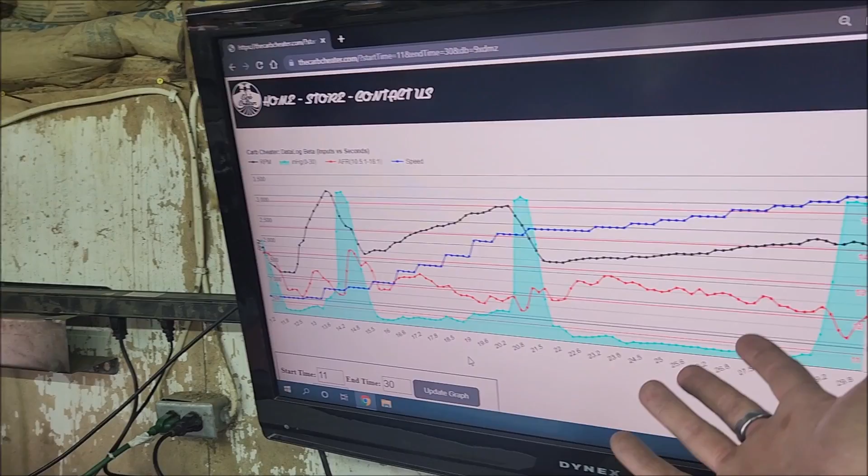Now the carb cheater actually has AFR adaptive capability based on a lot of this telemetry, but in this case, I'm starting to see why everyone likes the 300 inline six so well, because when it's tuned right, it's rock steady and consistent. This is what you want for high load AFR, and it's doing it all on its own with the carb - honestly it's just really good. The carb cheater does some stuff at idle to keep it consistent, and a little at cruising, but overall the carb's pretty dialed and it's just doing its thing on its own, and we can see everything that shows us that. We're pretty happy with it.

All right my friends, thanks for coming along with us today on our little F100 revival. I think Joe's dad will be able to drive down the road with the truck and not have to worry a thing about it. We're going to get to this car here shortly - it's been off the road for like forever. So Joe's been working like crazy to put this thing back on the road as a vintage style drag car. We're definitely going to have to play with that one a little bit.